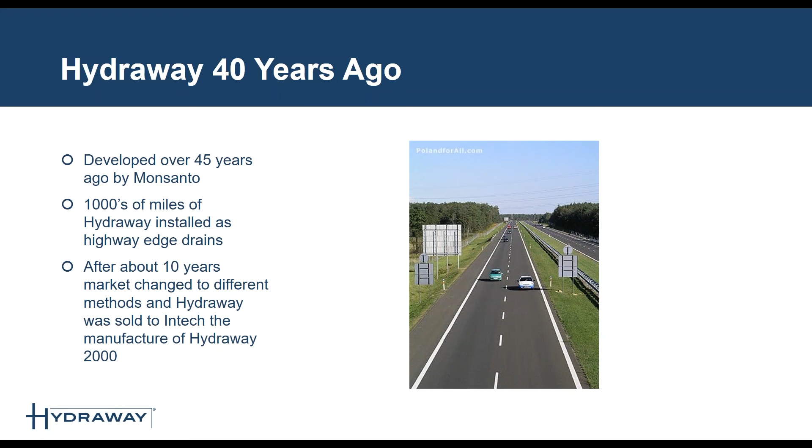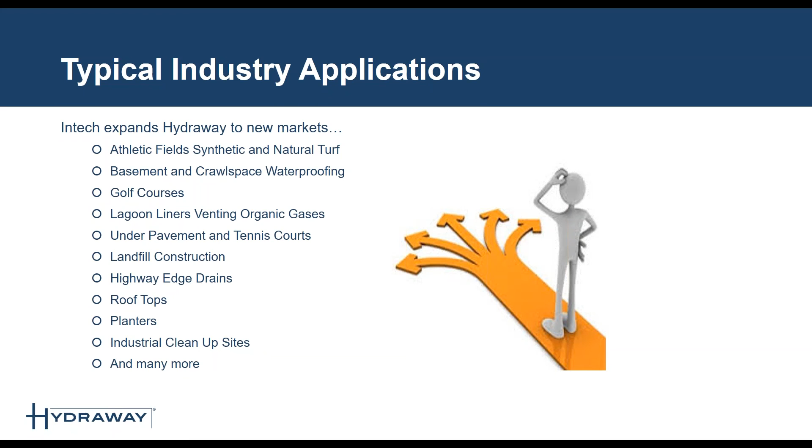Over the years, we have expanded the usage of Hydraway to many other applications beyond highway drainage. For instance, we have used Hydraway in athletic fields, both synthetic and natural turf, basements and crawl spaces, golf courses, lagoon liners, venting organic gases, under pavement and tennis courts, landfill constructions, highway edge drains still, rooftops, planters, industrial cleanup sites, and many more. Today we will discuss some of these applications and talk about the innovation and value Hydraway brings.

On this slide you see a visual representation of Hydraway 2000. It comes in 6-inch, 12-inch, 18-inch, and 24-inch widths. The most common widths are 6 inches and 12 inches.

On the right hand picture you see Hydraway 300. Hydraway 300 comes in two widths, 19 inches wide, referred to as our slit version, and the 38-inch wide version, the unslit version.

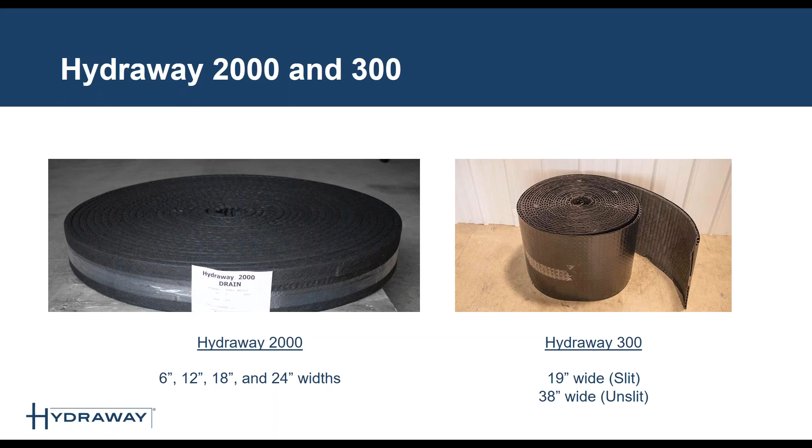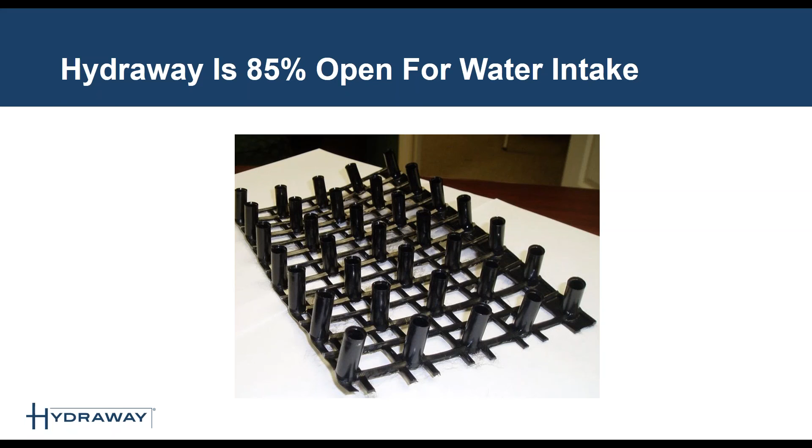This slide shows what the inside looks like for Hydraway. The core is made of high-density polyethylene, which is very stable. We take a quality non-woven geotextile fabric and bond it to the core, wrapping it entirely. With these two components, we get the best of both worlds: a strong product that is able to transmit water very quickly into the system.

This slide demonstrates a few types of testing we do. On the left, you can see the transmissivity test, which shows how the water passes through the core. On the right, we have crush and peel testing. Our testing shows that Hydraway performs as well, if not better, than other flat panel drains in the market. We've even had test results come in at 16,000 pounds per square foot before the product crushed.

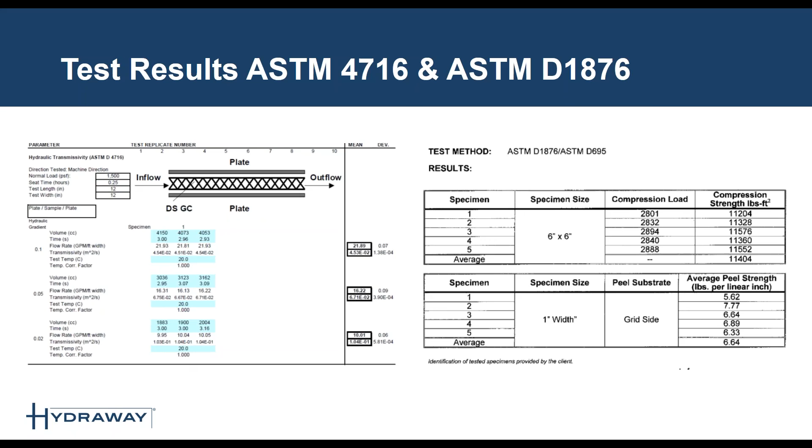As mentioned, we do typical transmissivity testing that demonstrates how Hydraway does well in terms of the flow rate through the channel, but this doesn't really tell the whole story. Another important feature where Hydraway truly shines is its ability to transmit water into the system. It doesn't necessarily matter how fast the water goes through a product if the water doesn't get there fast enough in the first place.

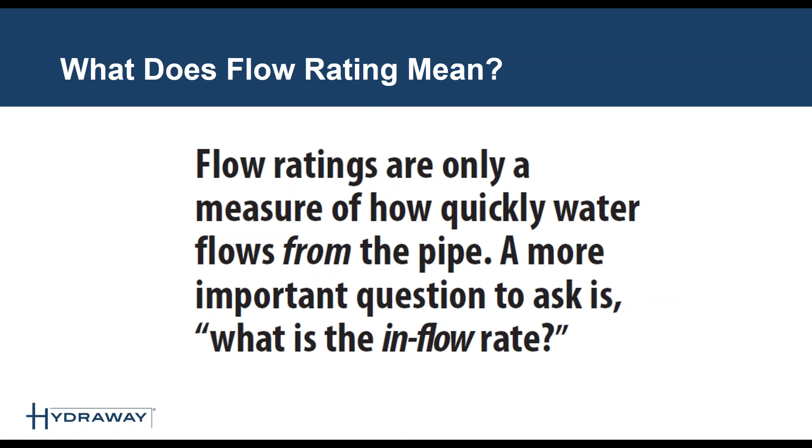Round corrugated pipe for drainage is the most commonly installed material for drainage. Because it is the most common does not necessarily mean it's the best product for the application. When pipe is used for drainage of sports fields, for instance, there are some items to consider: performance, ease of installation which results in labor savings, and trench compaction that can result in a pipe failure.

Hopefully by the end of this presentation, you will be able to pick up on the advantages of Hydraway in the specific applications that we talk about.

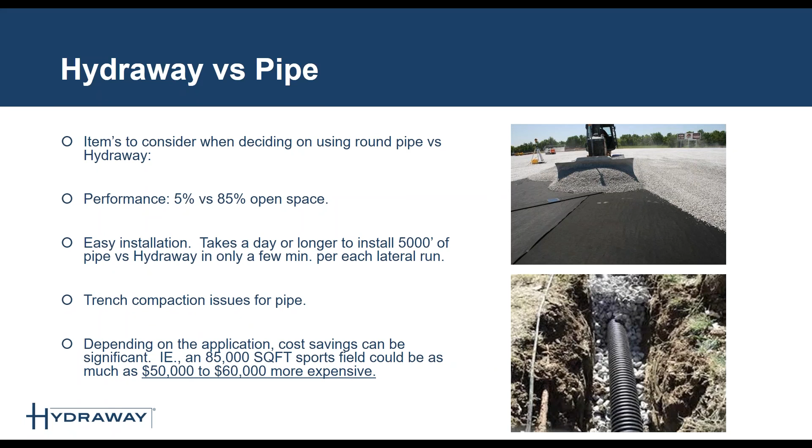The comparison of transmissivity of products can really tell a bad story. If you compare the flow-through rate of products, a 4-inch pipe has a rate of 32 gallons per linear foot per minute. Hydraway 12-inch has a flow-through rate of about 22 gallons per linear foot per minute. So you'd imagine that the perforated pipe would outperform Hydraway, right?

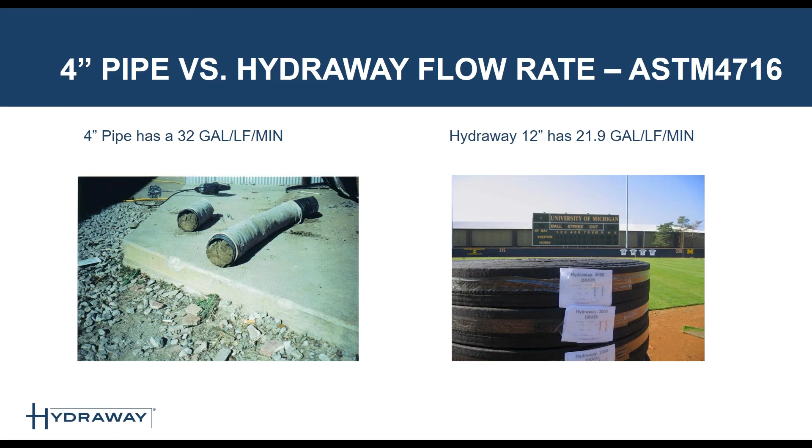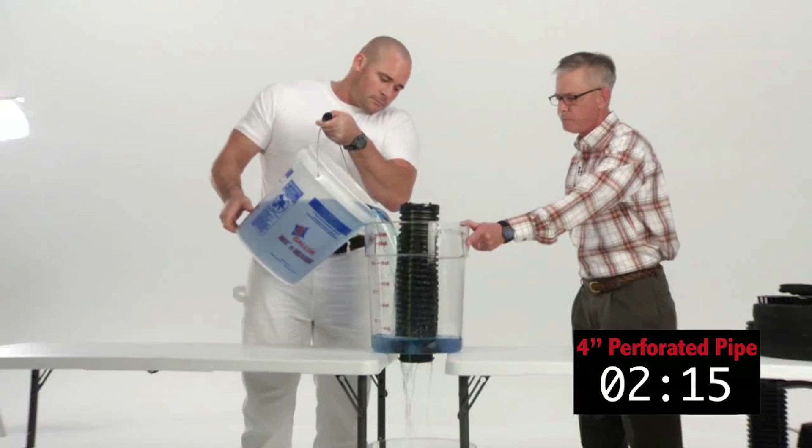We've come up with a simple test that demonstrates how Hydraway can really compete with these types of systems. We call it the bucket test. The first test uses 4-inch perforated pipe in a bucket sealed at the bottom. This test shows how slowly water flows into the pipe, so the water backs up on the outside. The same thing would happen in the ground where water wouldn't flow into the pipe. Also, if the materials on the outside of the pipe aren't properly designed, the pipe can eventually silt in and cause a blockage.

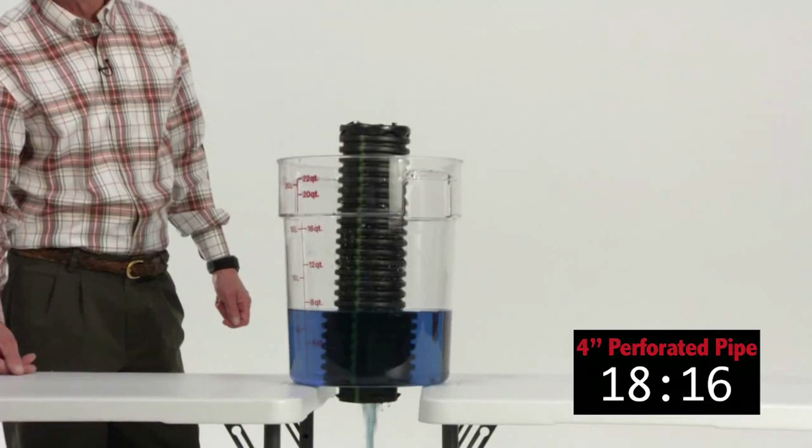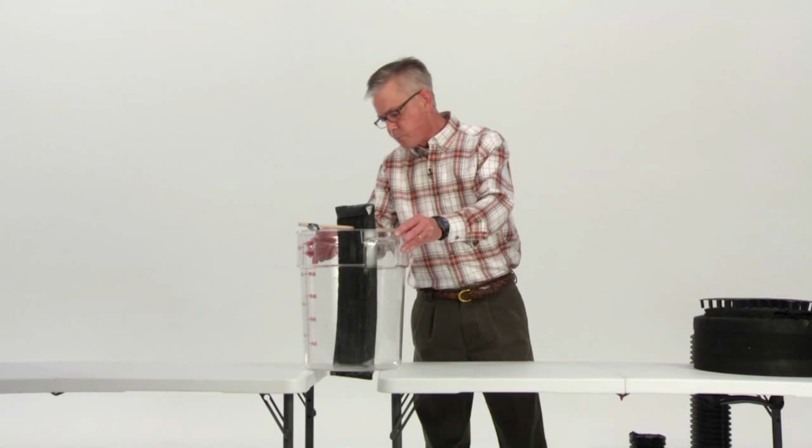It takes the pipe 27 seconds to move the 4 gallons of water through the system. For our second test, we take two pieces of Hydraway back to back and put it in the same configuration as the pipe, sealed at the bottom. As you can see, the water only takes 11 seconds to move through our system.

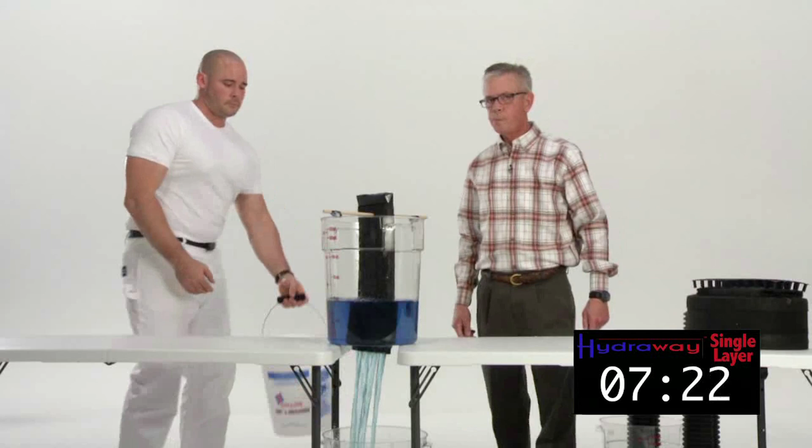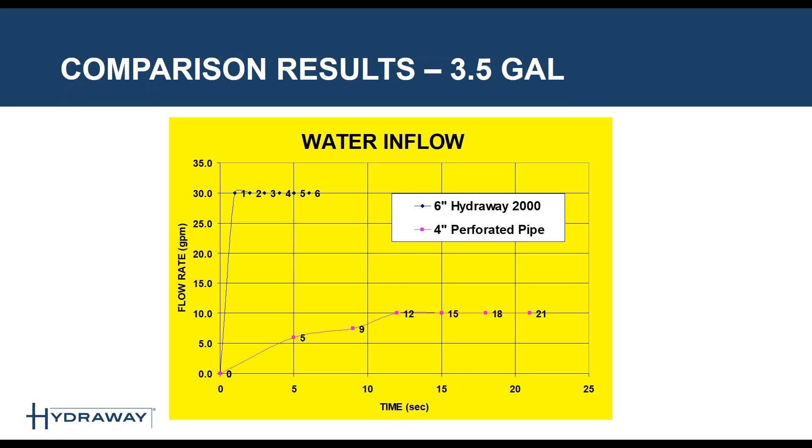Alright, now here's a graph representing the test that you just saw. As you can see, Hydraway completely outperforms the perforated pipe due to its ability to allow water to inflow into the channel more easily. Even though the water can flow through the perforated pipe more quickly, it becomes the choking point in the system because it won't let water into it as easily.

Alright, now here's a chart that shows the features of Hydraway compared to some other competitors' products. One of the first things that separates us from our competition is that we use HDPE plastics for our core, which won't break down. The core also doesn't have issues with memory, so it will roll out more easily and not want to stay in that curved shape as it's rolled up.

Hydraway has industry-leading compressive strength properties as well. When you install it, you can run over it with equipment without crushing it. As you look further down the chart, you can see we have a very high percent open area. This is the component that allows water to pass into our product very quickly, and our flow rate is comparable to others in the market. Combining all of these things together really sets Hydraway apart from other products in the market.

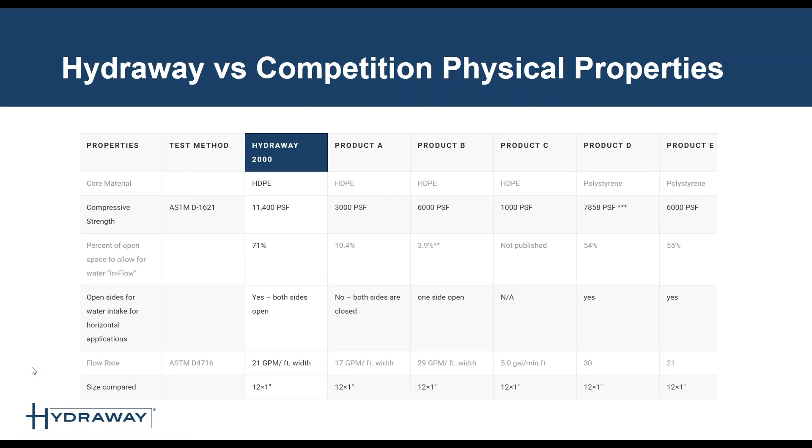Alright, now I want to talk about the fabric. There are a number of options in the market, and we chose to use a non-woven geotextile because it allows the water to penetrate into the system.

Some competitors' products use this spunbond material. If you're not familiar with spunbond products, another example would be Tyvek, the building wrap. This material is specifically manufactured to prevent water from penetrating a building, so it's not a good option for trying to get water into a channel.

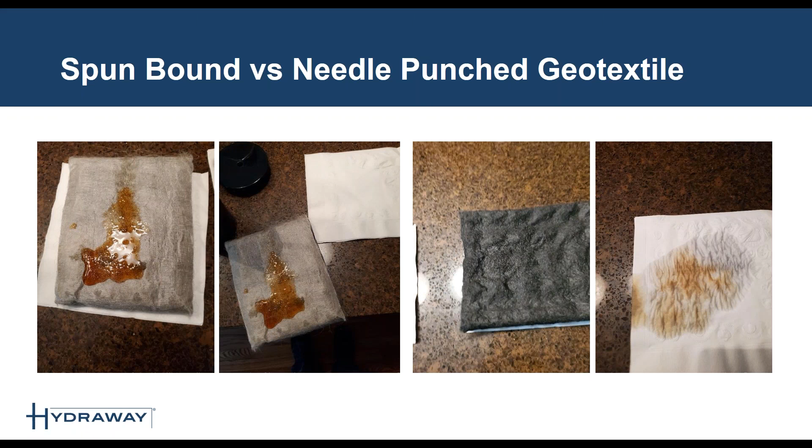Well, thank you, Sean. Let's dive into some of the specific applications of Hydraway and talk about some of the value associated with each of those applications.

We have had significant success over the years installing Hydraway under literally thousands of synthetic and natural turf sports fields. A synthetic sports field playing surface, for instance, has an average lifespan of 8 to 10 years. But the base should last approximately 50 years, so it's vitally important to install a well-performing drainage system.

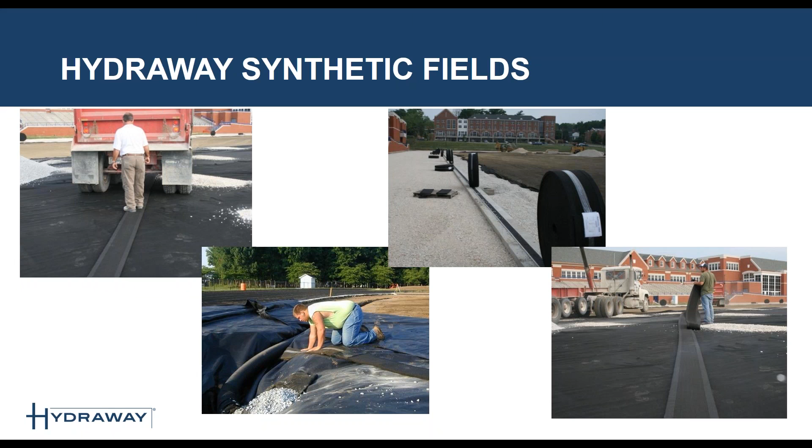Once Hydraway is put into position, heavy equipment can be used to push the base material into place with no damage to Hydraway, thanks to its very high compressive strength. We also adhere a big yellow sticker at the beginning of the roll that says 'this side up' to assist the installers. This ensures the material is positioned correctly.

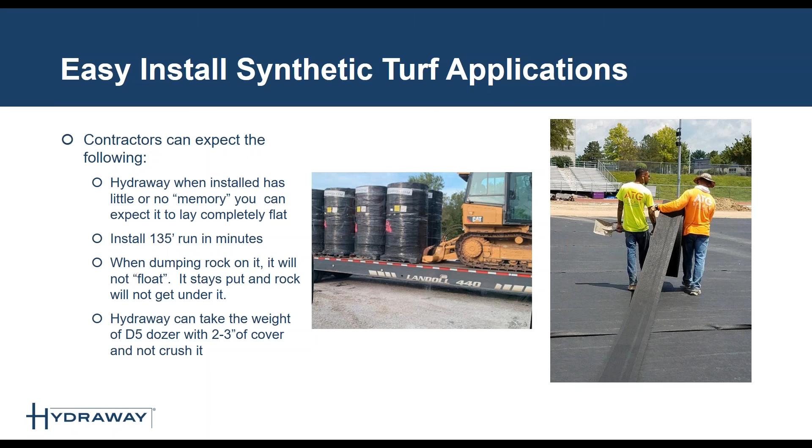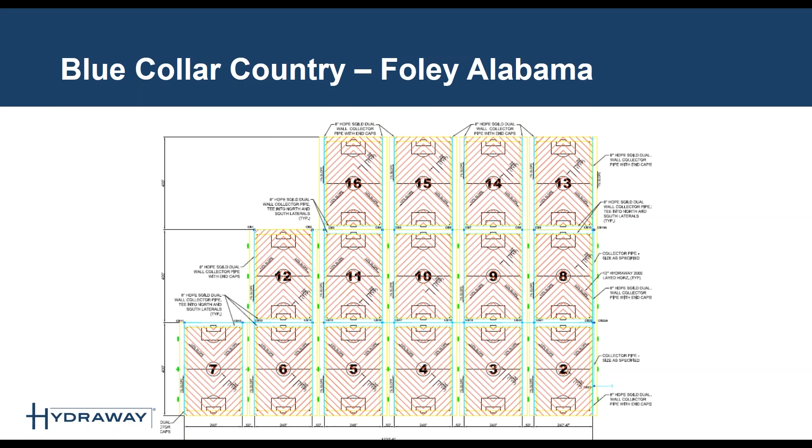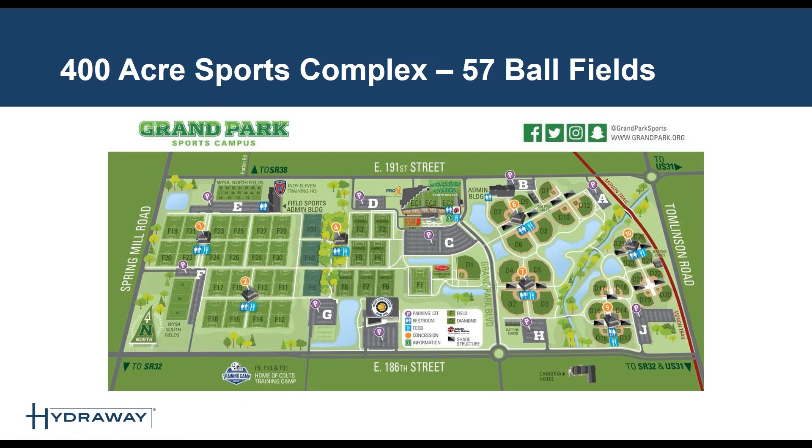For a successful water drainage project, it is important to pick a suitable backfill material. Depending upon the application, we recommend that contractors pick a sand that will provide a high perc. rating. Sands like playground sand and cement should be avoided, obviously. If your application requires grass to grow over the backfill, you can create a mixture of 70% coarse clean sand and 30% soil and apply that to the top 3 inches of the trench. Grass will grow back nicely and you will never know that Hydraway has been installed.

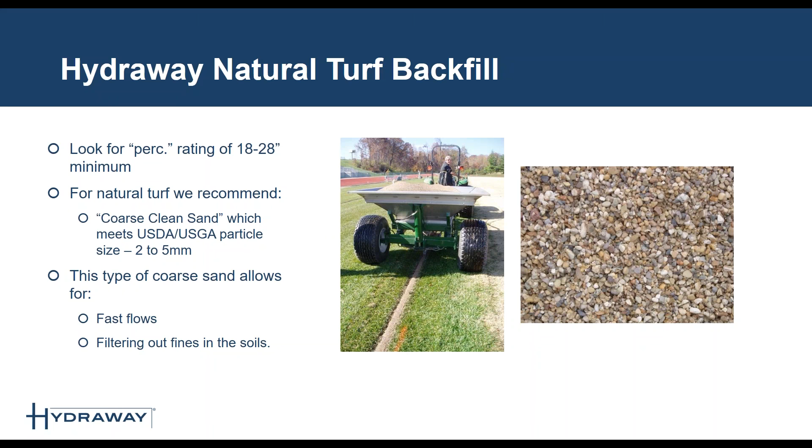We think of drainage as a given in our yards and basements, but drainage in a Major League Baseball facility, for instance, is vitally important to keep the field operational and to resume play as quickly as possible. The drainage of the fields is designed to evacuate a given amount of rain in a given amount of time. Again, the inflow rate is vitally important to all of these applications of Hydraway.

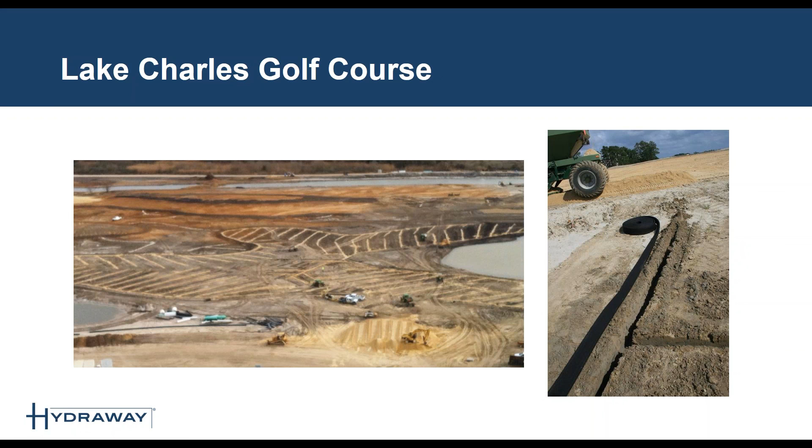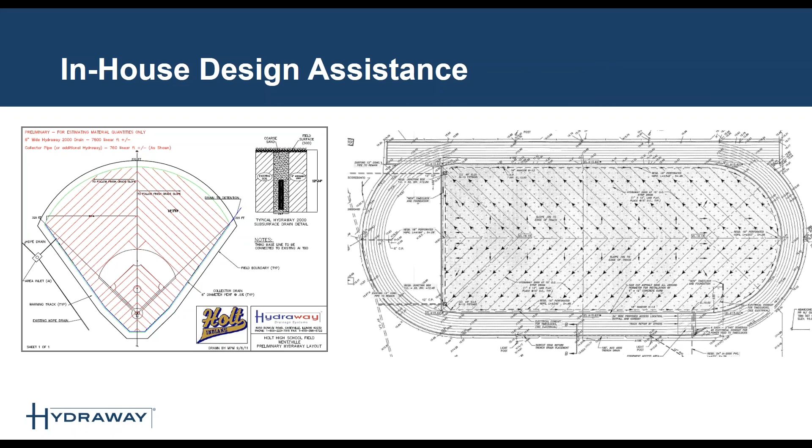We have recorded thousands of successful references on athletic fields over the years. For a homeowner considering Hydraway, it's reassuring that the product they are considering for their homes may be the underlying drainage system at their local school stadium, for instance. Go to hydraway.net/about/projects to search your state to see what fields are running Hydraway near you.

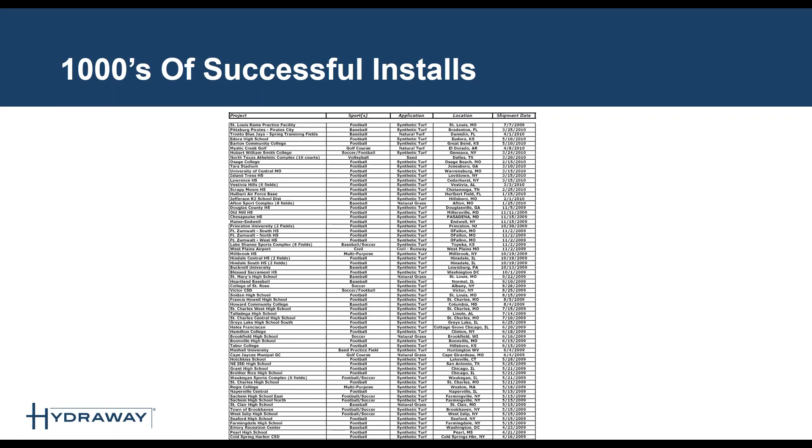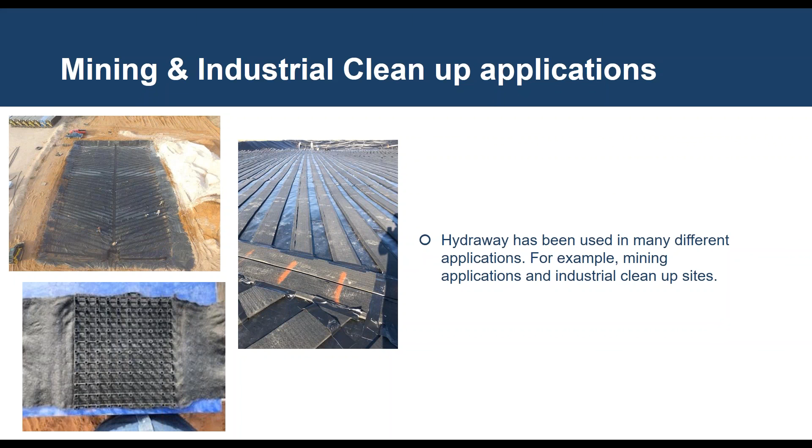Another application for Hydraway is industrial cleanup sites. Most of these sites have harsh chemicals such as chlorides running through the system, which are very harsh on geotextile fabrics. We're happy to report that Hydraway is performing as expected, and the geotextile fabric and core are holding up nicely in the success story referenced here. Most of your applications will not involve such harsh chemicals, but you can rest assured that Hydraway will continue to perform in your application if it's performing in this harsh one.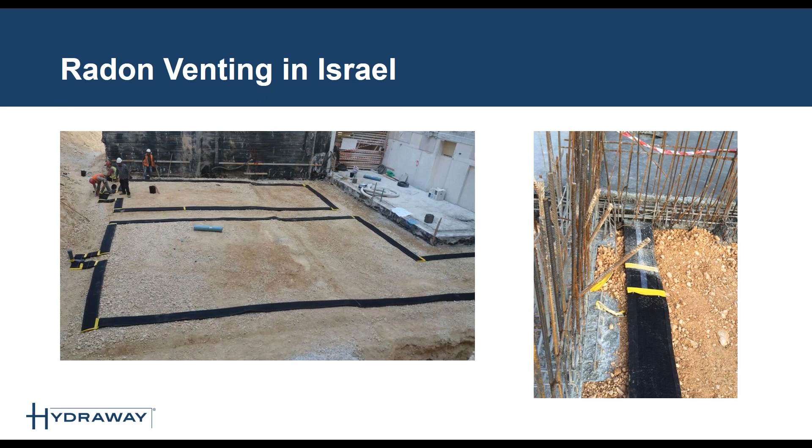Another application we have provided assistance on is radon mitigation. In this application, Hydraway was installed prior to the construction of the building. It provided a pathway for the radon to be vented outside the building, reducing the potential risk of the gas affecting the people inside.

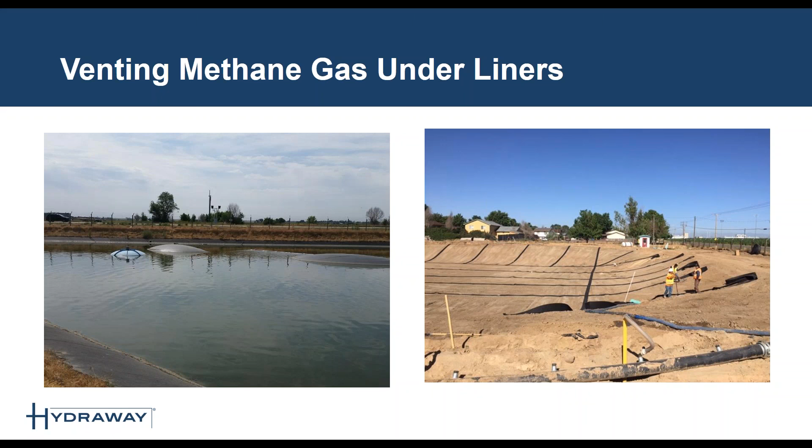We also have a product line called HydroVent. We typically look to use it under liners, but have also used it in underground structures to prevent gases from penetrating inside. As you can see in the picture on the left, there are a few spots where the pond liner is peeking out over the water. This is happening because ground gases built up under the liner over time, forming what we call a whaleback. These whalebacks can impact the usable volume of a pond, as well as have legal ramifications related to the Department of Natural Resources. If HydroVent had been installed under the liner, it could have provided an escape route for the gases, preventing these whalebacks from occurring at all.

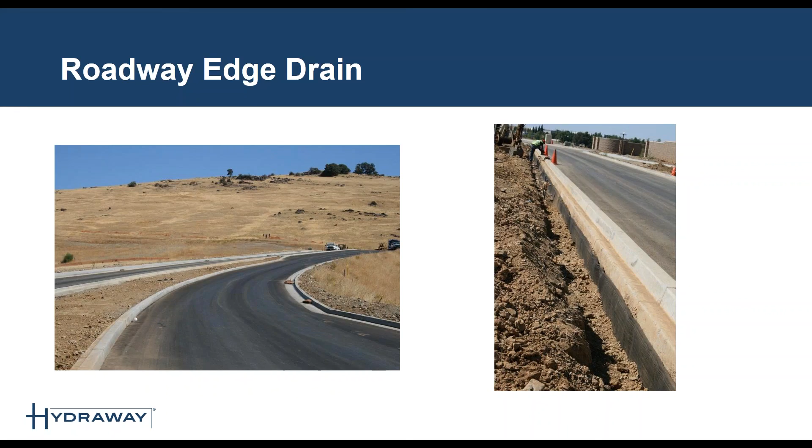As it was originally intended to do, Hydraway can still be used at roadway edges and airport runways. A lot of times we also see it installed in medians and grassy areas, as it prevents excess water from ponding up and potentially flooding roadways. Hydraway can also be used under tennis courts, reducing the impact of freeze-thaw events by preventing water from forming ice lenses through the winter. This can extend the life of the courts quite a lot.

This allows for less conservative pavement designs and extended pavement life.

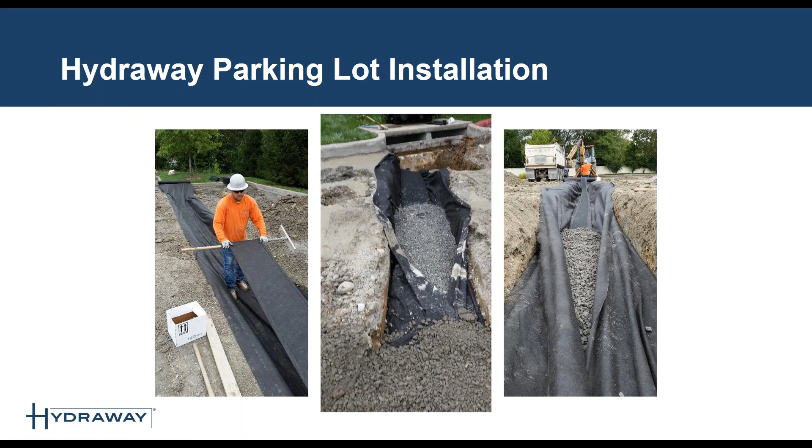For over 40 years, Hydraway has been installed in basements and crawl spaces to drain water throughout the Midwest. Water in a basement or crawl space can create a damp, musty smell. Also, as hydrostatic pressure builds up under the basement, the water needs to be evacuated as quickly as possible to your sump pump pit, to be pumped outside of your home or crawl space to avoid damage.

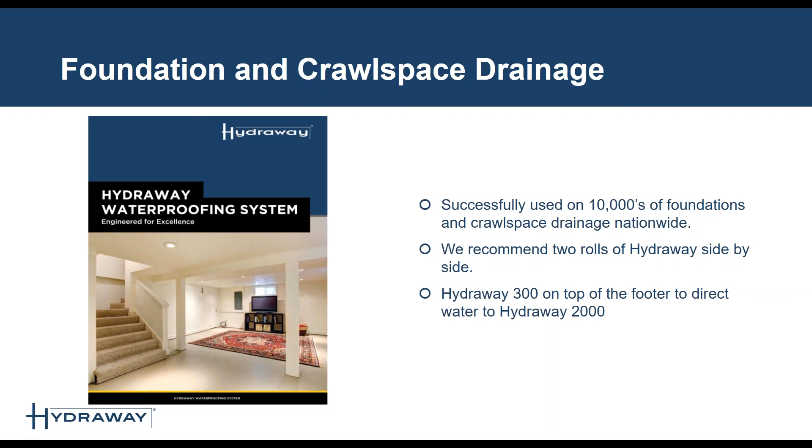This is a typical crawl space installation, for instance. Hydraway is installed to intercept and capture the water as it enters your home or crawl space and provide a channel to a sump pit so the water can be moved to the exterior of your home.

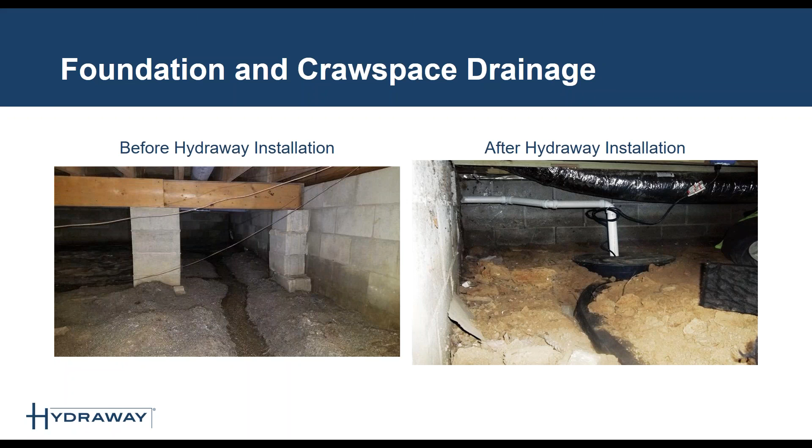Notice that 2 rolls of Hydraway side by side are installed in the basement. If you're going to encapsulate the basement, for instance, it's not necessary to cover the Hydraway with any sort of fill. As long as Hydraway is not exposed to UV rays, the installation will be just fine.

In the event water is seeping through the foundation walls as well, we capture that water and bridge it to the Hydraway 2000 system. Hydraway is flexible enough to make the bends in the corners of the basement and terminates into the sump pump by creating a 2-inch by 6-inch slit in the sump basin, or you can use one of our end-out connectors and terminate to the basin through a 4-inch round hole.

All right, so I talked about Hydraway, the installation of Hydraway requiring less spoils. This is particularly important if you're an installer, for instance. One of the hardest tasks for an installer of a waterproofing system is to actually break up the spoils, carry the spoils out of the basement, and then bring in the clean fill material.

One of the big benefits of Hydraway is you can actually take the spoils that you remove from the trench. After you install Hydraway, you can literally reuse those spoils as backfill for the Hydraway 2000 material. This dramatically increases the production rates for your installation crews.

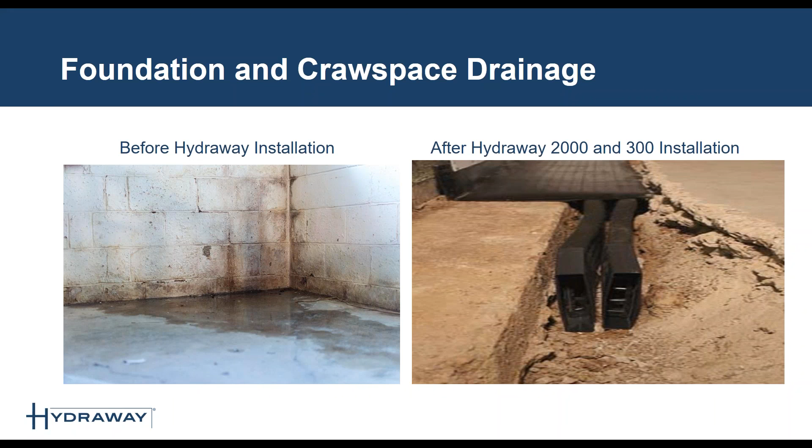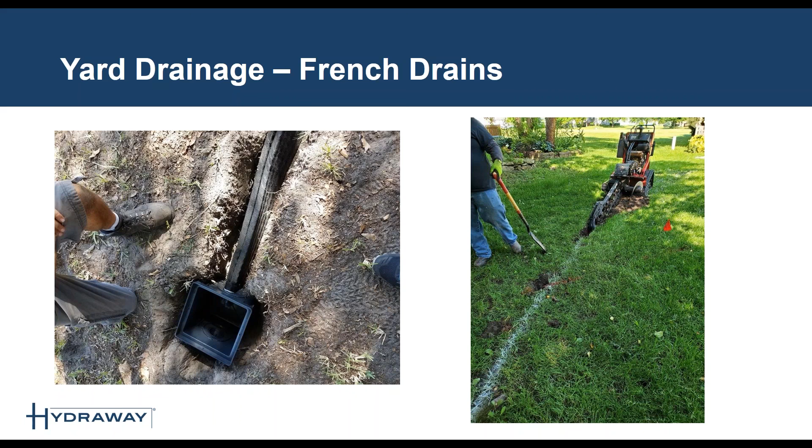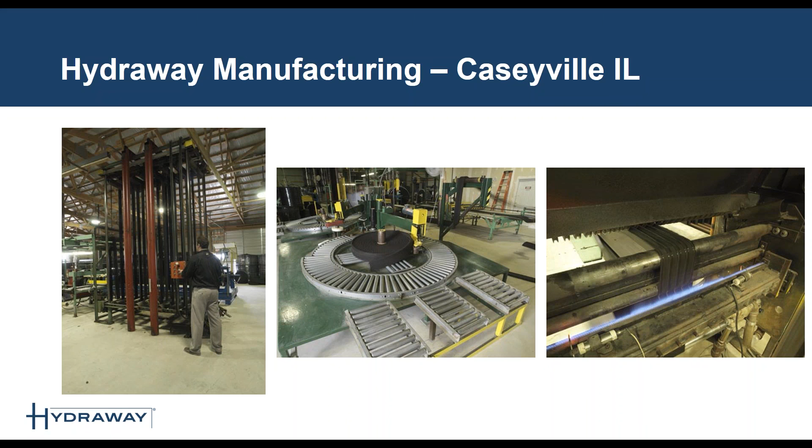All right, so here are a few photographs of our manufacturing facility in Caseyville, Illinois. Our local staff work the product through the system, putting together tens of thousands of linear feet of Hydraway each shift. Additionally, our staff performs in-house quality control testing at frequent intervals to make sure the product is as good as it can be.

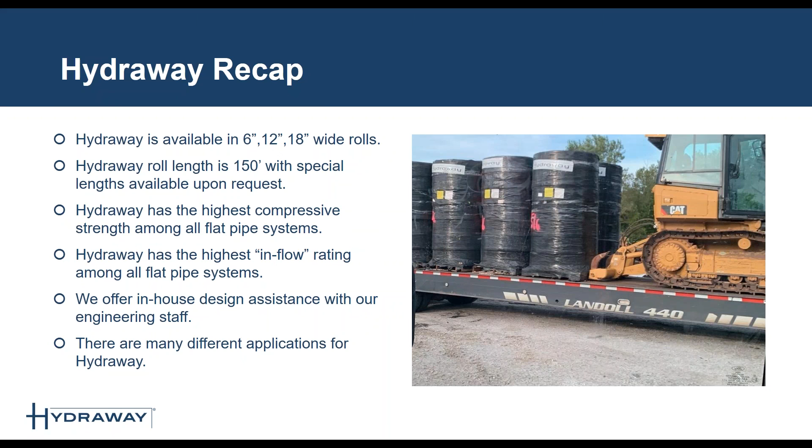Sean talked about our in-house design assistance with our engineering staff. And we talked about a few applications today, but there are literally many different applications for Hydraway. Hopefully today, you'll be able to walk away with some ideas on how you might want to use Hydraway.